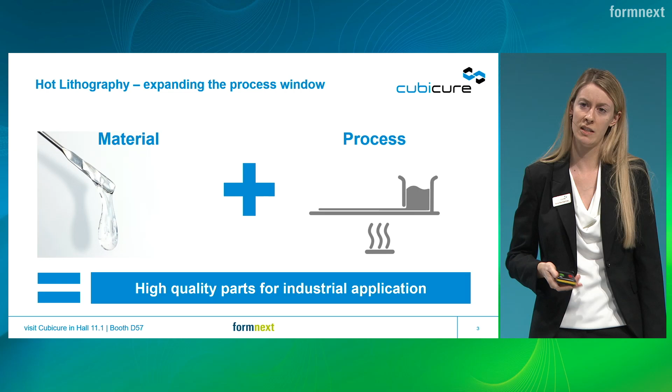Just in this combination, you are able to get high quality parts for industrial applications. But not only material and printing processes are important, but actually covering the whole process chain. We were able to show that only if you cover the whole process chain, you're actually able to get everything out of this whole 3D printing process.

That means you have to have the parts design, slicing, the whole job preparation in your hand, then material manufacturing, material development, printing processes, post-processing - very important, I'll come back to that later on - and then, of course, service and training. You have to enable your customers, because you don't want them to need several PhD students to get one part out of the machines. So training is also a very important part of this whole process chain.

If you take a look at our current material portfolio, you can basically see what we've been focusing on in the last few years. We have materials which can be used for very high precision parts, so a lot of requests for micro parts manufacturing. Then there are soft elastomer-like materials, because there are also applications for that. And we have high temperature materials, flame resistance materials, and materials with certain electric and dielectric properties, which were very interesting for specific applications in the electronics and connectors industry. This is what we've been focusing on in the last three to four years.

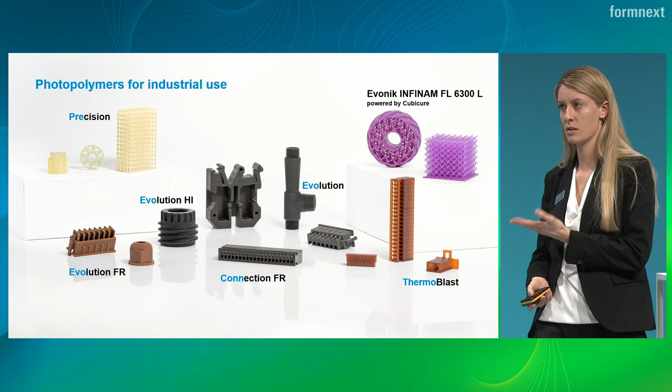In order to process these materials, because they are very high viscous at room temperature, we need to heat up the whole process. So our printers work at elevated temperature, that's why we call it hot lithography. Both our printers can be heated up, so we have a small one and a large one.

The small one is the Caligma system. You can use that for your part development, for prototyping, but also up to small and medium-sized production, depending on how large your parts are. Our optical resolution is 18 microns, and you will not find many other stereolithography printing technologies on the market with that higher resolution. So we're really able to reproducibly print very precise parts.

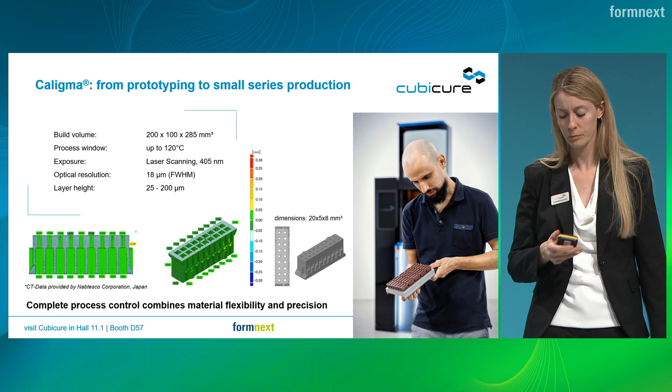And the whole thing has to be scalable. Past issues with stereolithography were that they were limited in platform sizes because of known issues, like separation forces—you'd need hundreds of liters of material just to start the process. We had to rethink the whole process and develop something completely new, where you wouldn't need hundreds of liters, and where you'd have more flexibility in production and in the scale of your build platform.

And Cerion is what we came up with. If you don't know the process yet, I invite you to come to our booth later so you can actually see how it works. Just to give you a hint, the platform is 1 meter by 280 millimeters, which is very large for stereolithographic printing, with a very high resolution of 50 microns.

So we are actually able to produce on a large scale, either one large part, or better, a lot of small parts in one machine. Just to give you an example, if you have one of these small connectors, we are able to print several millions of parts per year on this one machine. So we're already really in industrial batch lot sizes that can be printed on this machine.

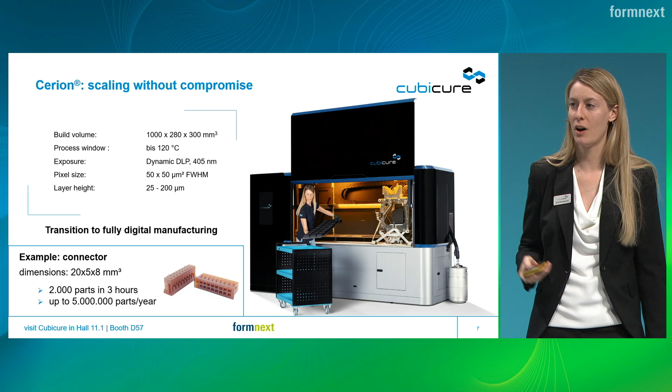So now we finally did this transition to fully digital manufacturing, and how this whole process chain looks like, I will show you in the next video. Oh no, first, post-processing—I forgot about that.

Very important. Since a lot of 3D printing companies out there more or less ignored the last part of the whole process, the post-processing, we had to come up with a solution, because now we were finally able to produce a lot of parts, and then someone had to clean them. That's why we came up with this post-processing solution.

We separate the large build platform into smaller segments, put them in a centrifuge, and collect the residue material from these segments, which can be recovered and put back into the system. They are requalified and then put back into the system. So we are actually able to recover more than 90% of this material.

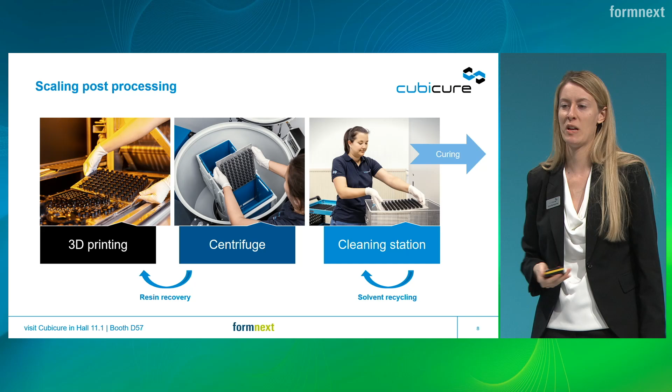After that, it's put in a solvent cleaning station, and internally, in this cleaning station, the solvent is distilled—so the solvent is also reused and recycled, to minimize the whole solvent use in this process. For us, this is sustainability, this is industrial, this is what is necessary for mass production of printed parts. And now, the video.

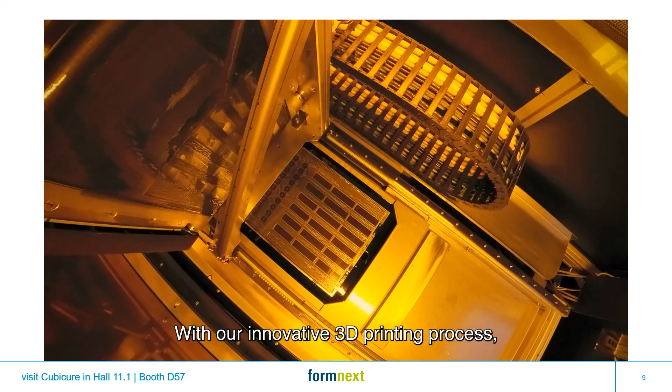This is how your ideas become reality. With our innovative 3D printing process, produce large parts or thousands of precision components in one go. Digitalize, customize, industrialize with hot lithography.

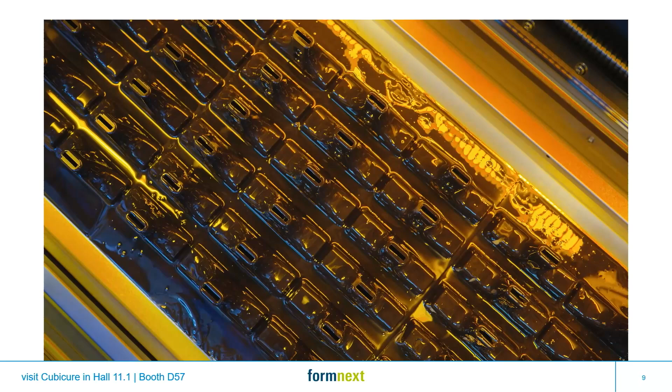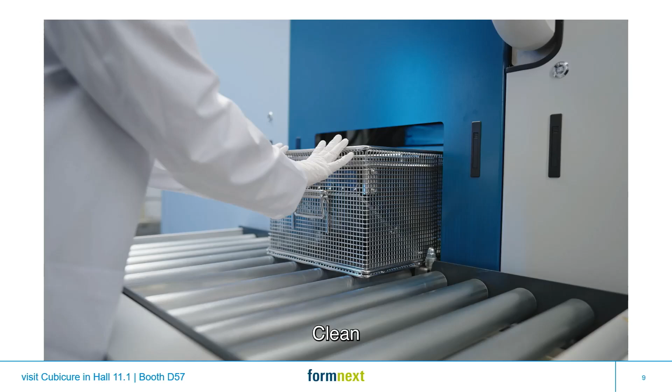Production has never been this flexible. Remove excess material that can simply be recycled. Clean and cure - quickly, safely, and sustainably. From idea to finished product within days. Experience full production flexibility. Cubicure, your solution for digital production.

Thank you, Sonja. Great video, was very impressive. Thank you very much, and also thank you for introducing the great technology and the amazing potential this technology holds.

In preparing my part of the speech today, I was thinking what could explain how disruptive additive manufacturing could be for serial production for you guys in the audience. I thought maybe the best thing would be to bring some solutions that we already realized in terms of serial production. So that's basically the core of my part today.

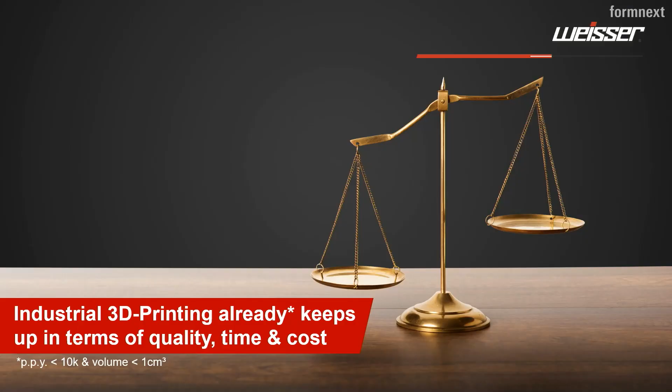I'm very happy to tell you today that we are already able to keep up in terms of quality, time, and costs compared to a traditional technology. And the technology I'm referring to, based on what Sonja said, is plastic injection molding.

So for a short introduction, we at Weisser are a plastic injection molding company. We are established around 100 years on the market, and we are producing on roughly 90 plastic injection molding machines, producing almost 500 million parts per year. So we really know what serial production is all about.

And when we decided to go into additive manufacturing, it was only at the point that we saw there is a technology ready that could meet up with the requirements for true serial production of end-use parts. And I can tell you here, it's possible. We have the cases and we are ready to do that, because even more, we are already doing it.

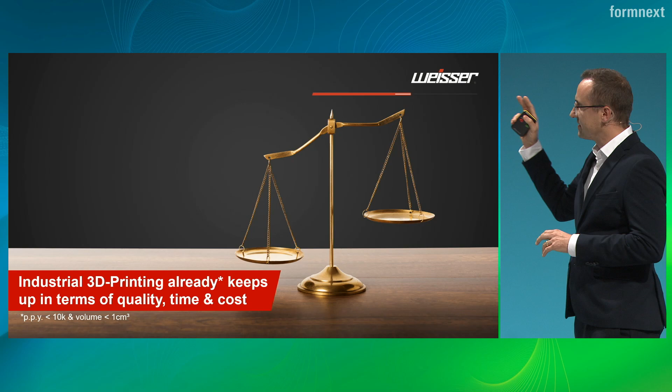Meaning, in a quantity of less than 10,000 parts per year and a volume less than 1 cubic centimeter, we are able to even meet the cost requirements of plastic injection molding. So we are at the same level.

And why I'm so excited about that is because when you introduce a new technology, or a completely new process into manufacturing, you need to be at least as good as the existing technology, and you also have to have an add-on value. Sounds a little bit unfair, because you need to be at least as good and even better.

But I'll show you in a minute what this add-on value is and how you can really improve serial production through additive manufacturing. And that additional part is what we say is flexibility.

And this flexibility comes in design, development, and quantity. As you remember from my slide before, if you talk about serial production, you always have in mind these three things: costs, quality, and time.

Sonja showed you how quality is possible on the Cubicure systems. I tell you that time and costs are also possible at a normal level. And now we add flexibility as a fourth dimension to serial production.

And that's really new. To all of you who are attached to serial production, if you could get flexibility in your production process, just think about all the potential you can get with that. And when I talk about flexibility in design, development, and quantity, I talk about three things.